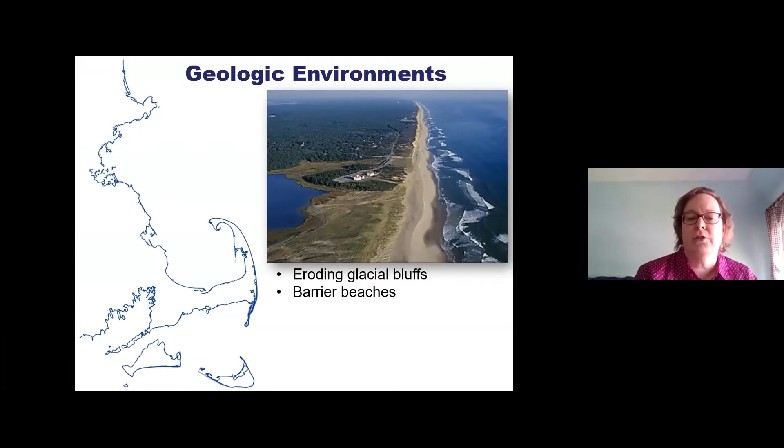We also have more cobble environments and even boulder dune situations that are natural systems. We need to keep in mind those grain size differences along the coast, as well as the ledge and bedrock outcrops we have.

Our tide ranges are anywhere from 1 foot to 11 feet, and the sediment types, as I mentioned, vary. The vegetation also covers quite a range of situations we're dealing with.

In the altered sites, it can be a little more challenging to pick out the resource areas, but they are still there. They still have some functions, and it's important to recognize how the system is functioning and how it can be improved.

As part of that, we also want to look at sensitive resource areas and make sure we're aware of any nearby submerged aquatic vegetation, rocky intertidal zones, shorebird nesting, shellfish, and salt marsh. These all play a role in the design, permitting, and implementation of projects, so they're very important to keep in mind.

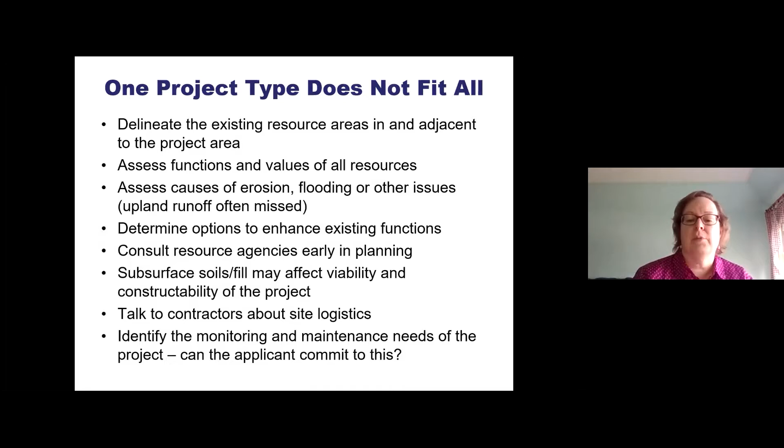You want to identify the monitoring and maintenance needs of the project, and can the applicant commit to this? In a lot of nature-based shore protection projects, it's very important to have some ongoing monitoring, maintenance, adaptive management program to make sure it's going to be successful and maintained in the long term. If you don't have a realistic plan for that, it can make the project challenging to implement, so thinking through that in advance is really important.

CZM has developed some Storm Smart Properties fact sheets on a variety of shore protection techniques. Certainly not all of them, but we're working on putting together some more of those.

The idea for these is particularly for property owners to help them make more informed decisions. This highlights what the shore protection technique is, where it's appropriate, where it might not be appropriate, how it functions to reduce storm damage, and what are some of the relative benefits, limitations, and ways to minimize impacts.

We highlight some of the design considerations to maximize effectiveness, and the permitting and professional services they really need to consider. Sometimes property owners think they can do some of these things on their own, and that isn't always successful for certain types of projects. We try to highlight the timeline, maintenance, and really point out some of those issues.

These are resources that a number of different audiences have found useful, and we'll be trying to develop more of those as we go forward.

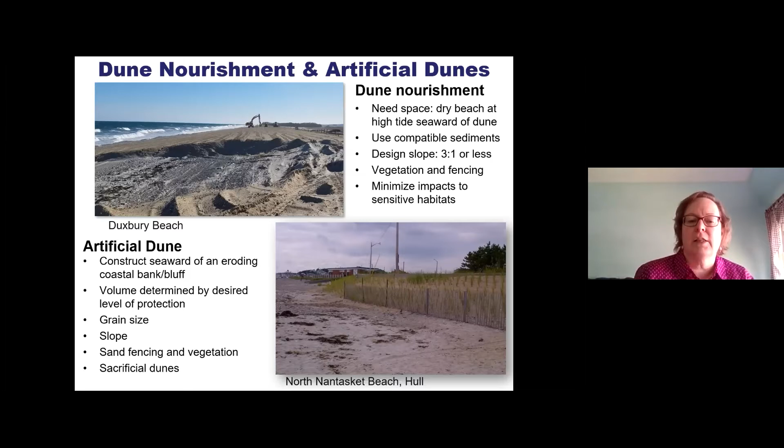We do try to highlight things like, for example, with Dune Nourishment, making sure you have enough dry beach width to have space for the dune. If you try to over-steepen the dune or put it too close to high tide, you can have a situation where it erodes much quicker. We try to highlight these things for different techniques that make a difference in the success of the project.

Vegetation is something that doesn't get enough credit for its benefits. We see a lot of places where there's just turf grass, and people wonder why they have a bit of an erosion problem. Turf grass doesn't have a whole lot of root system—it's less than an inch, very little roots, not a lot of holding power.

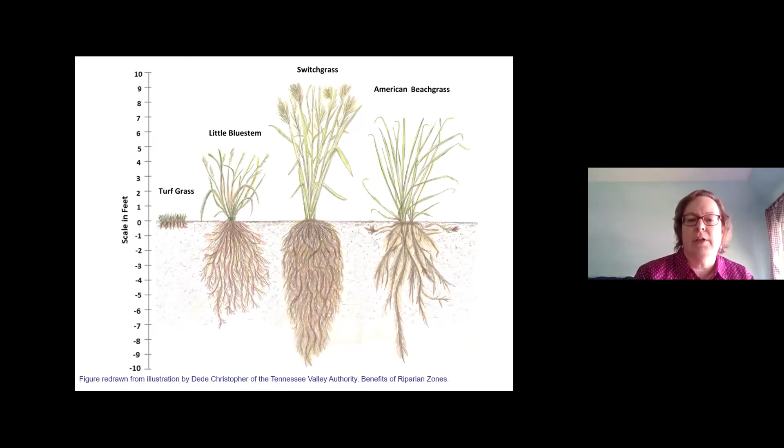Whereas if you use salt-tolerant native erosion control plants, those can have roots up to 10 feet and can be very helpful in holding the sediment, reducing wave splash, reducing some of the runoff, and slowing down the water. That vegetation can be a very important part of shore protection projects.

We looked at this as one of our coastal resiliency grant projects and worked with the town and their consultants to identify ways to enhance this site and reduce the erosion non-structurally.

In this case, they were able to look at creating a vegetative buffer with some native vegetation. They did create some access points through that to make sure people from the park going to the beach could still access it, of course.

We do have some tips for installing vegetation, specifically in one of the fact sheets—which vegetation to select for which sites, addressing invasive species. We have a lot of tips that are specific to the vegetation that you can take a look at in that fact sheet.

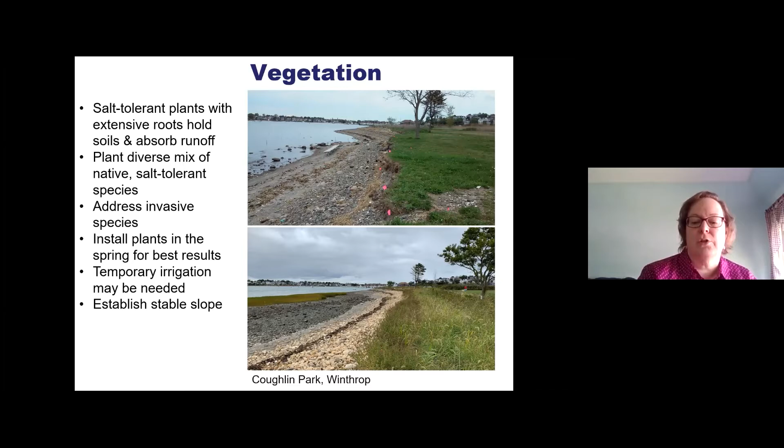You can also add bioengineering to vegetation to provide a little more toe protection at the toe of a bank. Fiber rolls can be very effective at giving you that toe protection so the vegetation can take hold. We strongly suggest avoiding Mirafi fabric or other filter fabric because that's just going to stop vegetation from penetrating into the soils and holding them in place. The key should be getting vegetation established, not so much anchoring rolls in place to provide the buffer. Those rolls are your temporary protection while you get the rest established.

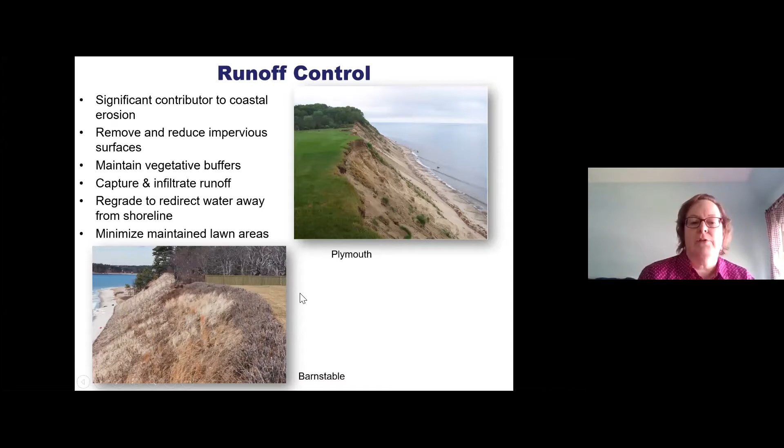Runoff is really important to consider. We've seen a number of sites where runoff is one of the key factors causing erosion. Irrigated lawns can be problematic in terms of increasing erosion, so maintaining some kind of vegetative buffer is really important. There's a big difference in how a site like this functions - they have a much higher erosion rate because of this irrigated lawn, whereas this site has sloped the lawn away from the top of the bank, created a nice vegetative buffer, and they were able to restabilize the bank with vegetation because of their efforts to address the erosion issues.

Fringe marsh enhancement projects are something we're seeing more of, and these are something you really need to carefully consider where you're putting them and whether they're appropriate for that site. You need to think about the potential erosion and flood control benefits to the site, and is that going to achieve what you're trying to do?

You want to be very realistic about the options for your site. You don't want to think that the marsh is going to stop 10 feet of surge. Think realistically about it - slowing down the water and stabilizing some of the sediments - and have a good idea of what you're trying to do with it.

The permitting pathway for marsh enhancement and restoration projects is typically easier if you have historic marsh that was there and you're just restoring it, or you're enhancing existing marsh. If you are trying to convert tidal flat to marsh, depending on the functions of that tidal flat, that may have more issues with the fisheries agencies in particular.

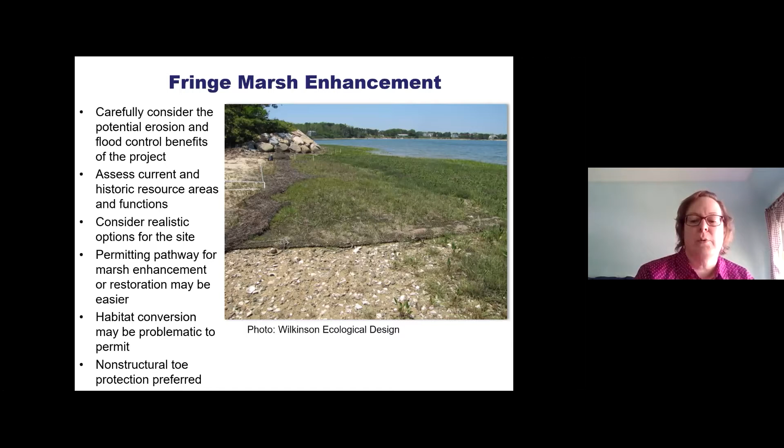So non-structural toes are also preferred for fringe marsh enhancement. That's something we suggest you consider as part of your planning process, and think about how you can design something that can be stabilized with a non-structural toe. If you're trying to build up a little bit of elevation, you need to think about how you're designing the plantings to stabilize it without long-term toe protection.

So if you are building up the elevation a little bit, make sure you're sloping it down and tapering it, and that the vegetation you're planting is going to be able to stabilize that when your temporary toe protection, such as your coir, breaks down.

So you want to think about a very detailed implementation, monitoring, and maintenance plan to get these projects installed. You can look at the adjacent areas and have a good idea what the plants are, but the actual implementation and what plants take where may be slightly different, and there may need to be some adaptive management - rethinking which plants you put where. What takes and what doesn't needs to dictate what you can replant and where.

That's really important - making sure the property owner or applicant knows that there's going to be some monitoring and maintenance while this gets established over a period of several years. It's sometimes necessary to do some temporary irrigation, particularly in the upper reaches of a marsh enhancement project, until you get that vegetation established. So keep that in mind as you're doing that.

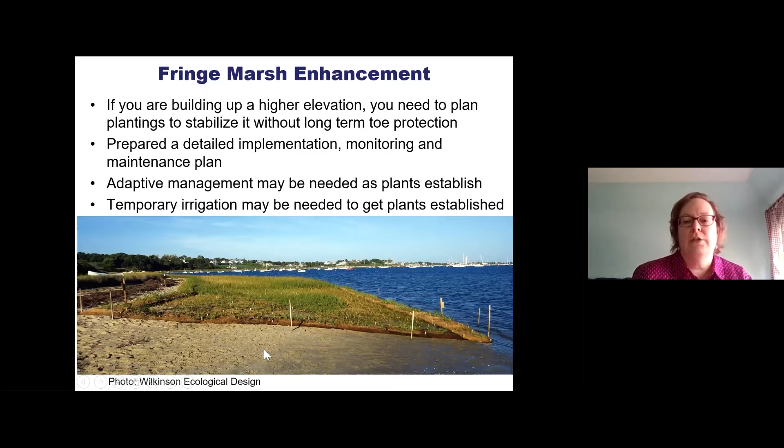So some resources for your projects. The Storm Smart Properties fact sheets are on our website. You can Google that and come up with those pretty quickly. The Beach Nourishment, Mass DEP's Guide to Best Management Practices for Projects in Massachusetts is available and has a lot of information for nourishment projects.

The most up-to-date shoreline change for the state is on our new coastal erosion viewer. That's not linked from our CZM website yet. We're working on that, but if you Google Massachusetts Coastal Erosion Viewer, it comes right up. It has the newest data for 2013 and 2014. And for any updated sea level rise projections, the best source is resilientmass.org.

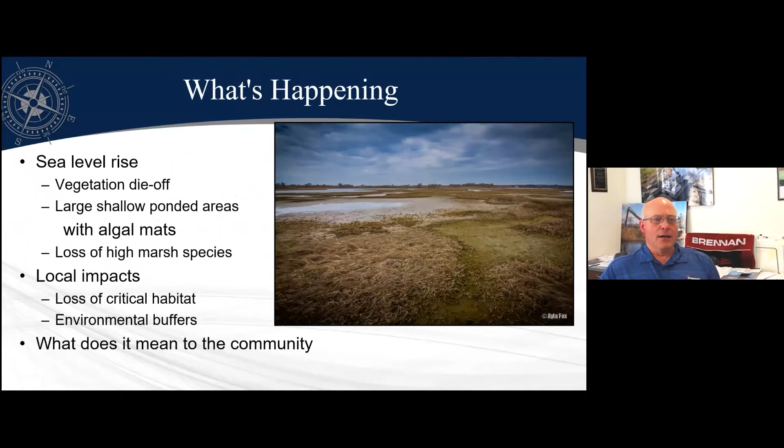So I'll go through some quick facts real quick. What's happening out there, where are we, how did it start, how was it done, and then more importantly, I'm going to focus more on the lessons learned. Obviously, we're out here because of sea level rise. They're seeing a lot of vegetation die off on these marshes, ponding, algae mats, loss of high marsh species, and a variety of different critical habitat.

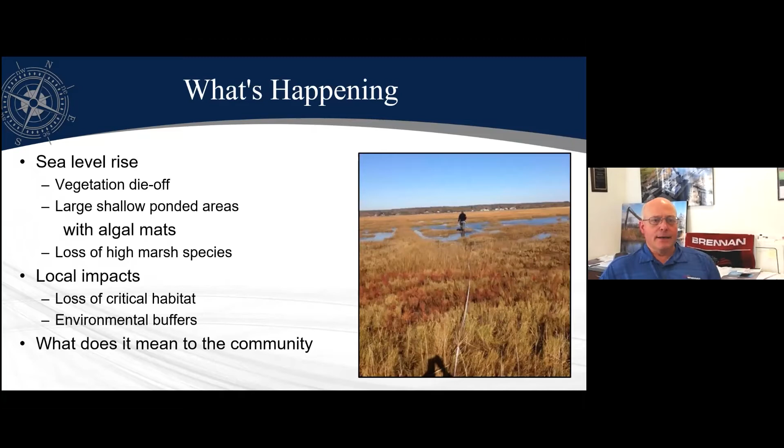The impacts are certainly great. They've seen these again and again. Some of these impacts include additional flooding on some of these marshes, but some of the impacts are on community fishing. I'm not going to go through the numbers, but the impacts have been shown and proven out there, the benefits as well as the losses. Tourism and trade, obviously for Rhode Island, and fishing are big. And then the environmental benefits — healthy marshes are nutrient filters, carbon absorption, a variety of other things. Getting back to the species of fish, additionally with aquaculture being a key issue on some of these salt marshes, as well as the ponds behind some of these salt marshes being critical.

And then loss of habitat for species and getting those back, and then even the stagnant pools dealing with mosquitoes and greenhead flies and things of that nature.

So where are we? We're in Rhode Island, looking at two different areas. The first one is, I'm always tough at pronouncing this one, Quonochontaug Pond. If someone wants to correct me, that's fine. I'm going to call it Quani from now on. They're located here. The area that we're going to be dredging is out in here, and there's the breachway access.

The other area is Ninigret Pond. Again, we've got a breachway access, which was part of the dredging application, and then used those materials for the construction.

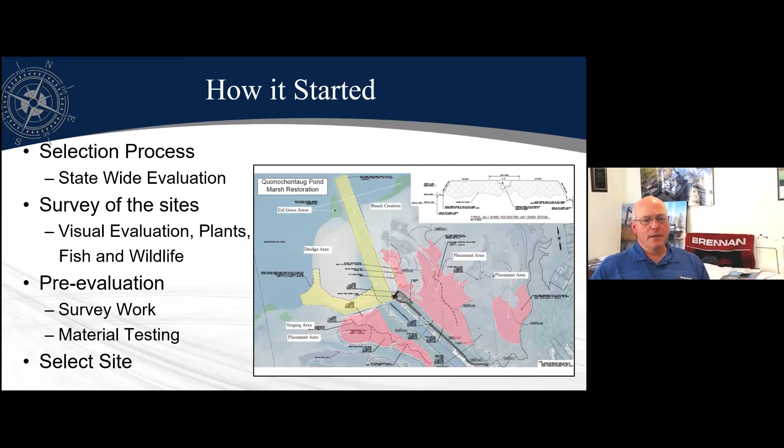As I mentioned before, aquaculture has become a big issue in those, and the oyster fishermen were really needing to see some additional water turnover.

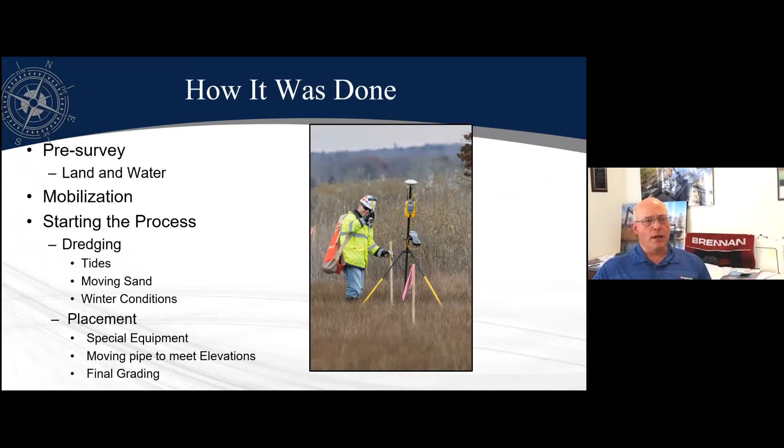So how it was done: we went out, we did our survey. We used different robotic stations as well as going out and doing hydrographic survey. We determined what the conditions were prior to placement as well as prior to dredging.

The areas were tough to work in. We had, for some reason, the two seasons, which were over a year apart, we picked the two coldest seasons ever. The project in Quani, the average temperature was 23 degrees during the entire dredging process, and we had days of wind chills of -40. And you can't stop. Even saltwater freezes at those temperatures, and you can't allow that to get into the dredge equipment and cause any kind of breaking of equipment or anything else. So we toughed it out and worked through these conditions.

Obviously, a number of safety concerns were involved. So we mobilized the site. We had to bring in a dredge, as well as some amphibious equipment and some barges to be able to move equipment around. One of the keys to any of these projects is to have a good access point to be able to swing in equipment. Sometimes people look at it and don't think about how it gets done. They just see what they want to get done. So access is a key factor, and understanding what tools the contractors are going to use to make it happen.

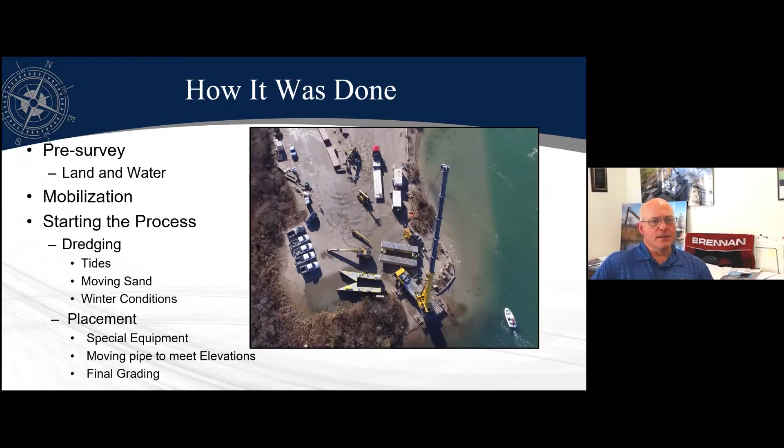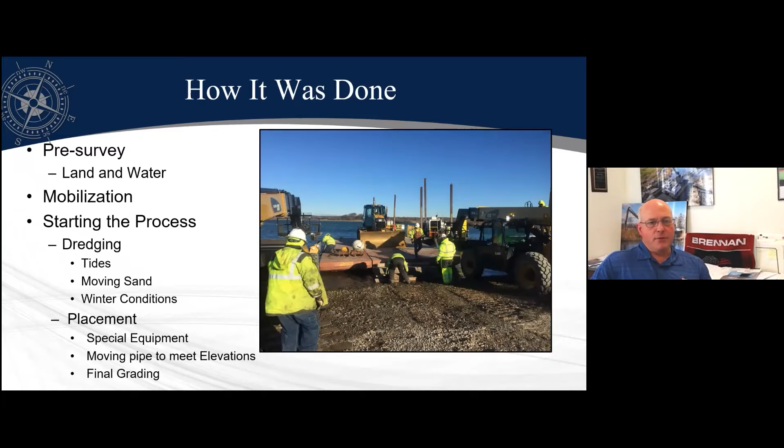This was a substantial amount of material to move, so we had to bring in some different equipment. We had to bring in some flexi floats, especially for both projects, because we had to move low ground pressure dozers across water to get to these different locations. So there was some logistical issues that had to be dealt with, along with some of the high flows in those breachways to be able to move that equipment.

Never fails, when you want to use a crane, it rains. But launching it again, a key component is to understand what you have available for this, because you can see this is a large crane. This is, I believe, a 200-ton overroad crane to be able to lift the dredge and put it into place. So those are considerations that really need to be looked at when you start evaluating some of these projects.

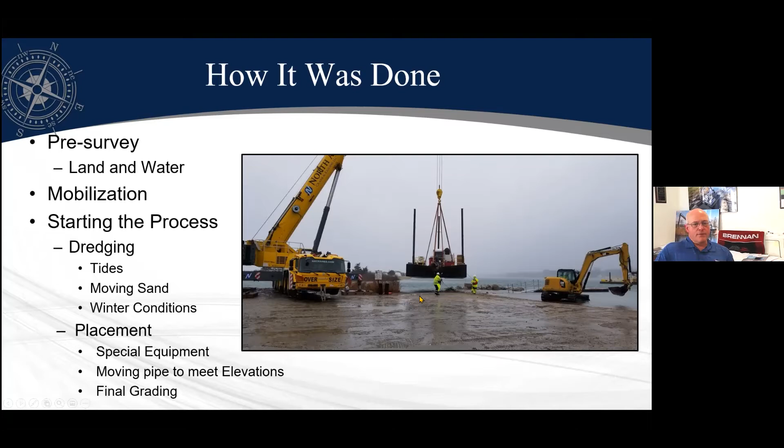We utilized two 8-inch dredges on both projects. They're swinging ladder dredges that we had manufactured to our specifications, a little wider and a little higher out of the water so we can get into very shallow draft areas. Very rarely do we actually get to see our dredge cutter heads work, but the water was so clear we were able to do that in this case. You can see how the sweeping action of the swinging ladder dredge pulls up the sand, and we can move it to different locations.

The other concern presented initially in our first project with CRMC was the equipment and its effects on the marshes. They were wondering how we're going to get the amphibious hoe over there, and literally when I was talking to Caitlin, she had her back to the water, and I said, 'That's how we're doing it.' She turned around and saw it basically treading its way across the water with a tether from a boat, because the tide was going out, and it would have floated out into the Atlantic if we didn't watch it. But it got over.

Then she was concerned about the grass, and these are extremely low ground pressure machines. This isn't just a low ground pressure machine, this is ultra low pressure—less than a pound per square inch—and you can see it tracked across there and didn't affect the grass. So again, some consideration and things to think about.

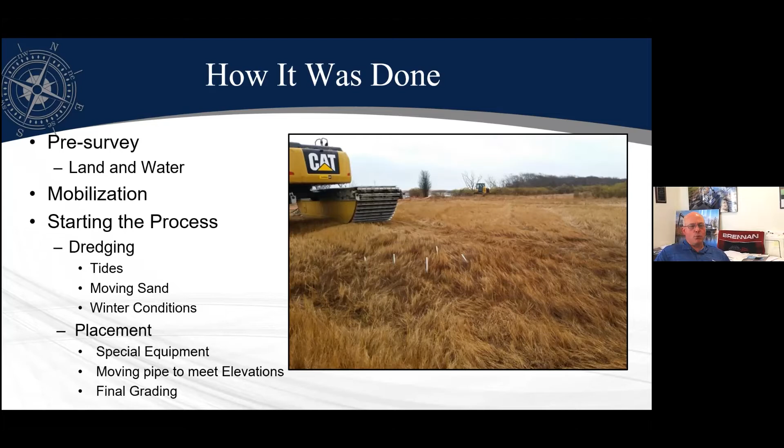It was determined early on by ourselves that we would bring the low ground pressure dozer over, but we wouldn't put it onto the marsh until we actually had a layer of sand that it could work on, to help offset some of the ground pressure.

So we had a lot of piping involved. They were filling in areas off to different sites so both dredges would be working into place, and once we got into those places, we were then placing the sand.

Again, the previous presentation discussed that every site is different, and this was certainly true for both of these sites. Ninigret had a very coarse sand. When it was placed, it dewatered very quickly and didn't flow. So we were continually moving the pipes to get the grades we needed in place. There was some flow, but not as much as the owner had expected, so we kept moving it to reach those elevations.

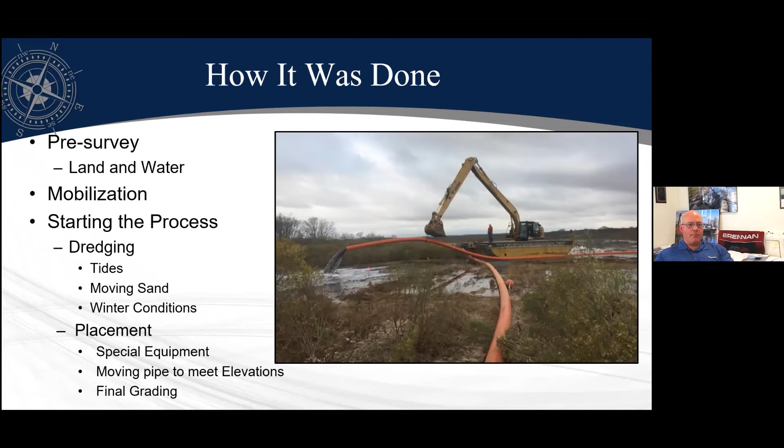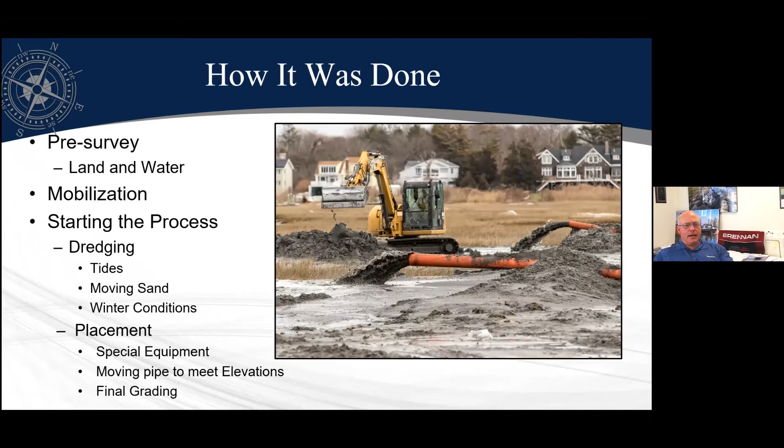Some of the thicknesses weren't technically thin layer placement, which is a big buzzword out there in a lot of marsh work, but not all of it. There were some areas with severe erosion and significant loss, where we had to bring in material, in some cases replacing as much as 10 to 12 inches of sand to get the grades correct. This other material flowed a lot more—it had organic material in it, very fine sand—and we were able to move the material quite easily to get it in place.

Once we got it in place, as I said, we had low ground pressure dozers, which is suitable—not the ultra low, but good enough once you've got that layer on top—to be able to get the grade. The key was being able to utilize ground, basically grade control.

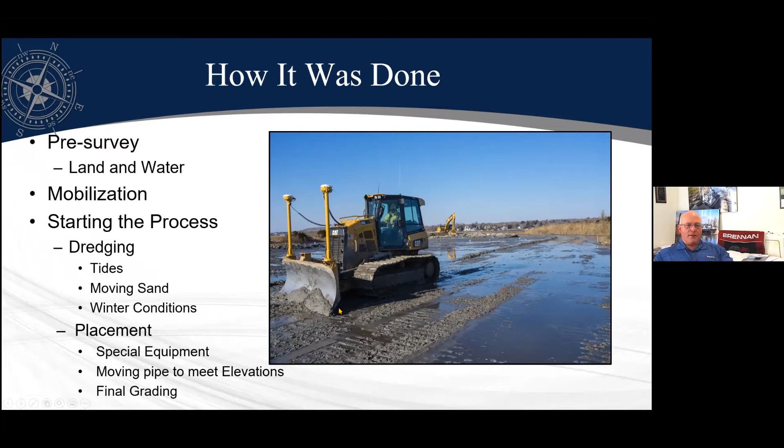Grade control was critical on any of these, because these sites needed to be graded in a specific way, to flow evenly across the sites up and down through tidal changes, and not create their own erosional effect and channeling. We'll talk a little more about that in a second, but it was very critical in getting the equipment put into place.

I'm going to show you a real quick video, only because it shows some of the activity going on.

As you'll see, the project is right on the ocean here. We're coming through the breachway. That's in some cases ice, since it's see-through.

This is one of the larger sites, actually the second largest site at the Quonnie site. You can see after it's been placed, it's very flat, with a lot of exposed sand, which we'll talk about again. The dredges are dredging in the channel and bringing that material over to those different areas.

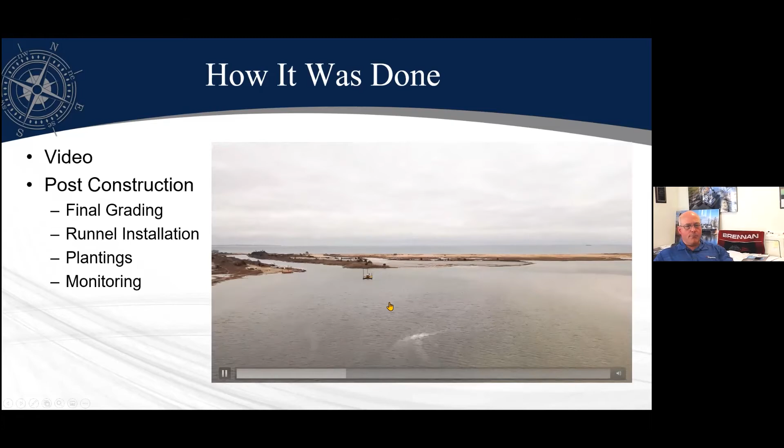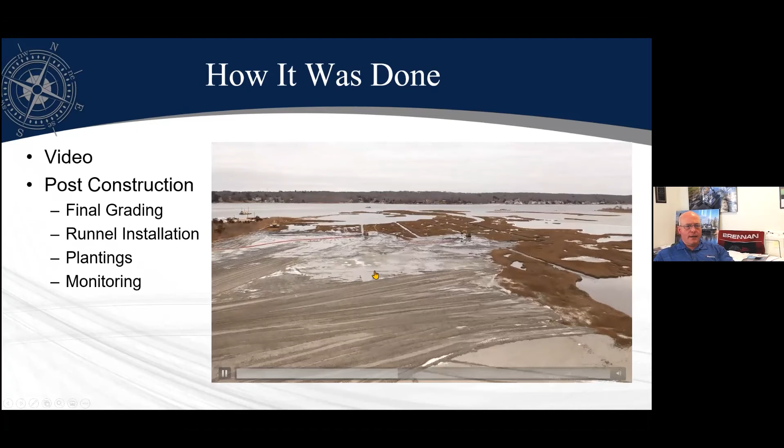Getting access and dealing with the tides is one of the critical things, understanding what those depths are. This is the original first start of the placement on Quonnie, covering this large area and filling in some of these mosquito ditches, moving the material.

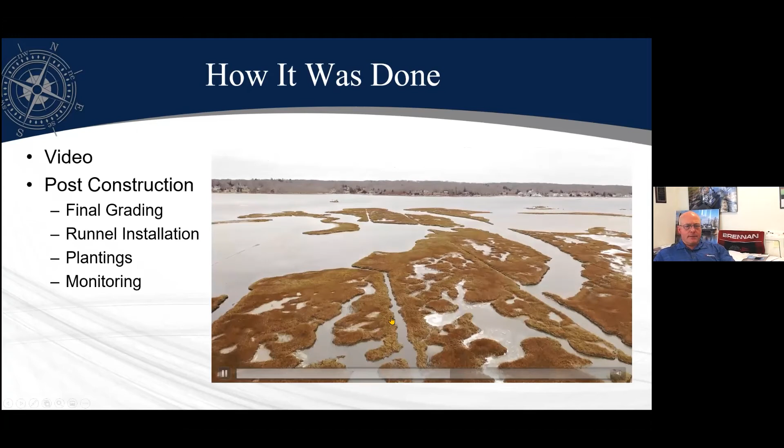You can see by the flow, Quonnie moved a lot faster than the other. Ninigret was a little different - the material was coarser, so it piled up quickly and we had to move it and spread it. In both areas, the water was able to flow off quickly to the side.

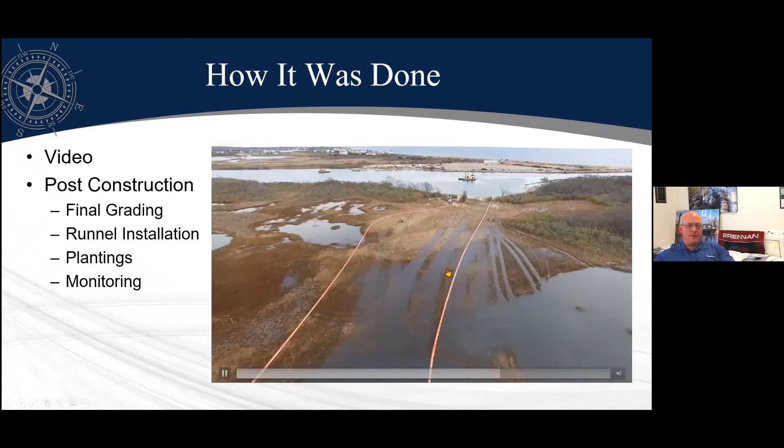Very little turbidity, though a bit more on Quonnie than the other. And you can see this is the area we're pulling the sand out - it was basically filling in almost as fast as we were taking it out.

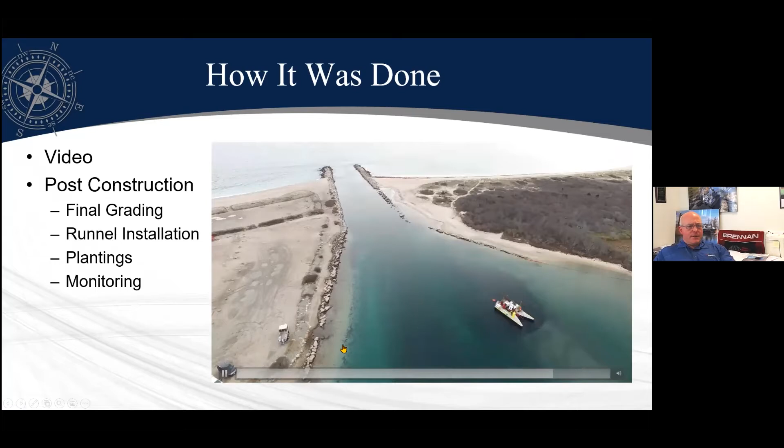Once the material was placed, you can see this is one of the large areas. It looks like a barren desert, which for the most part it is, once you put that material down.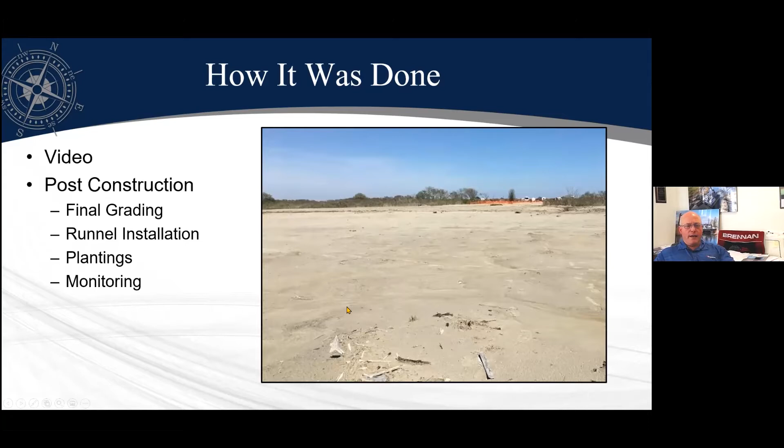You can see in this case there was some water flowing over the top, and some of the debris line shows as far as the tides came up. So we had some pretty good grading going through here. Again, it was critical to have that equipment up there to get those grades.

You can't just sit there and put it out and leave it in place - it's going to be mounded. You need to get that critical grade across the site.

One of the issues we kept running into with the grading was understanding the settlement rates of these marshes, which sit on top of large peat deposits. So the material needed to be placed and set for a little while before we could do a final grade.

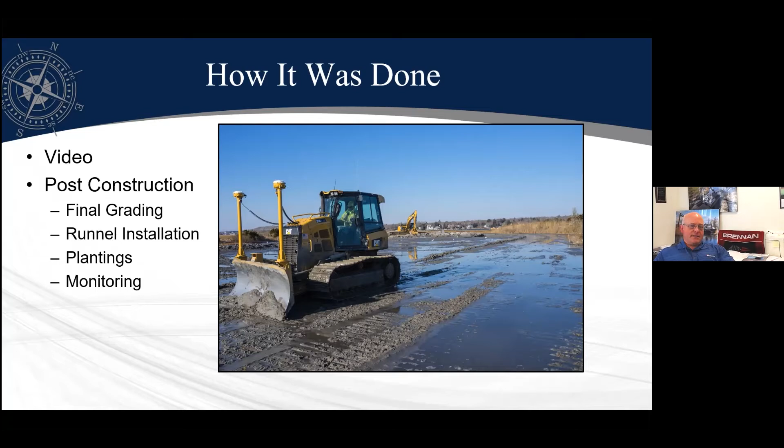We would place it, get a rough estimate of what the grade was going to be and where we had to take it, then do a first pass, let it set for half a day or a day, and then come back and do a final grade.

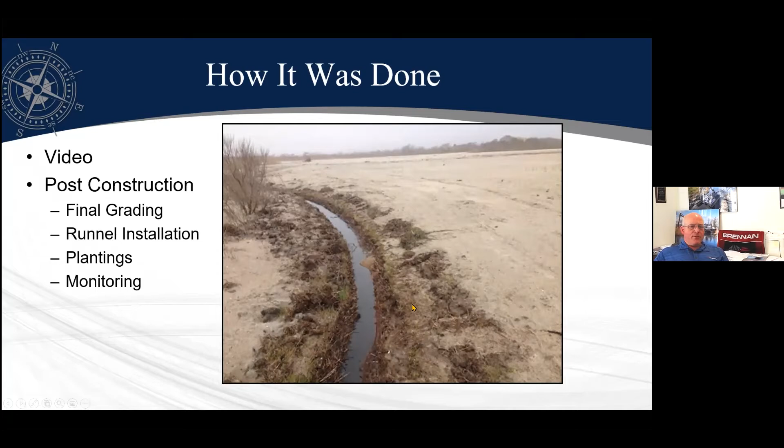Some of the runnel work installed afterwards, we did not do - this was actually done by Save the Bay and Wenley's group. They went in after we were done, with some predetermined locations, wanting these runnels in place to allow movement of material up and down the marshes.

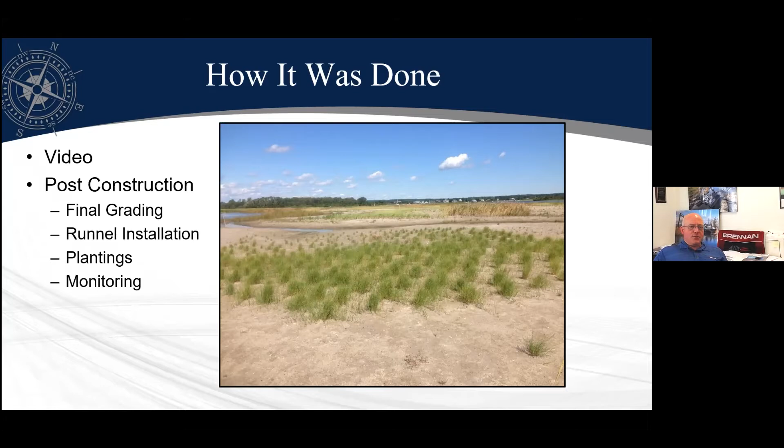They also incorporated some plantings, mainly for a couple of reasons - one to start regenerating plant growth, but also for wind control. It wasn't as big an issue on Ninigret, but Quonnie was a big issue because of the fine sand.

Then we went back and did some final survey once it was placed, understanding some of the elevations, doing some plant surveys and monitoring.

This was pre-dredging, post-dredging - this is Ninigret post dredging - and then the final was one season later, so really two seasons in a sense. Later, we had some great growth coming in.

This is again that site, just taken this past Tuesday. Dan Goulet got his drone out and took a nice shot of this - as you can see, it came back very well.

The runnels are working, the flow is coming across the marsh great, and from what I was told all the species they wanted are coming back. There isn't any invasive coming in, so very successful.

Quonnie, this was that large area - you can see some of the runnels they had installed going through. We removed all of the mosquito areas or ditches. But what they found here, which was brought up before - I'll get to that in a second.

Again, this is some of the runnel work that was done, some of the growth after one season. And another shot - you can see the growth coming in and the thin layer placement starting to fill in.

The goal here was not to really go back and plant everything needed, but more to use what was available and then plant where needed. This was all natural coming back in - they didn't have to plant this.

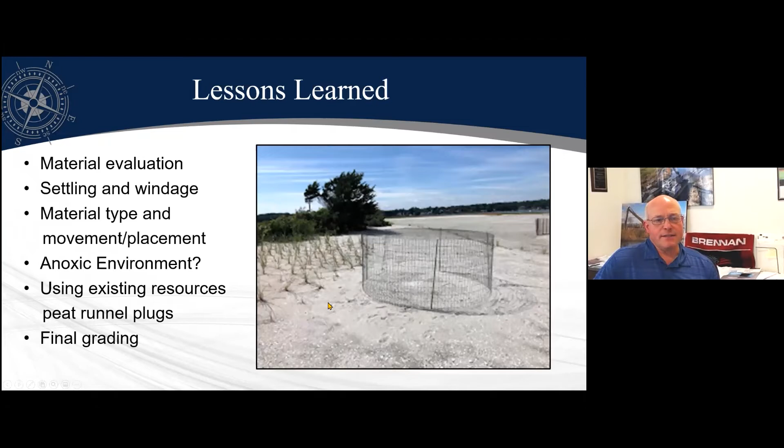This was a very cold day. We had a variety of people in there, the Army Corps, as well as the owner and Save the Bay. Very good discussion, impromptu - there were 14 people. This was pre-COVID, obviously, a bunch of people in a small trailer, having coffee and donuts and just impromptu conversation about how Army Corps is looking at some of these projects. They were very impressed with how the state was doing it and looking at doing some of this themselves.

It was a very good interaction between the groups. Hey Andy, the other thing is keep the oystermen happy, get water into their bays, and they will reward you. The boys from Wisconsin that came out, most of them never even saw an oyster, let alone ate one - now they all are professional oyster shuckers. They have their own knives, and we're enjoying the fruits of their labor with the local oystermen in the area.

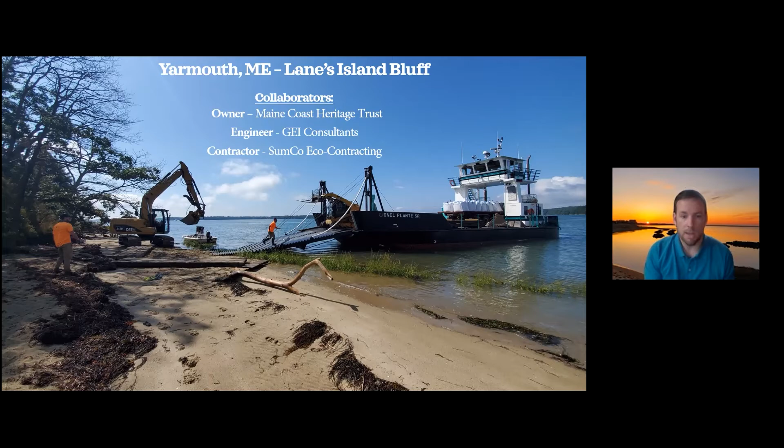The first project I wanted to talk about was the Lanes Island Bluff Restoration, which was up in Maine. The owners were the Maine Coast Heritage Trust, GEI Consultants was the engineer, and yours truly, SumCo, was the contractor. This was a good example of early collaboration that went really well.

Great title picture here, and a couple project pictures on the right that'll explain. The teaming up part of this project's design intent was to use natural materials. As much as possible, this project was part of a grant that really stressed using on-site and/or natural materials — designing with nature, apparently.

The main point of this project was to stabilize an eroded coastal bank on an island in Casco Bay, Maine — a great place to work. If you haven't been up in that area doing any work, I highly recommend it. This project was only accessible by boat and by barge, which only made the project more fun, in my opinion.

To my first point about using existing and/or natural materials, the only imported material we used for this project was topsoil and some assorted small hardware to lash things together. Existing fallen trees were cut to design lengths, as you can see in the lower picture, and fastened together to form a cribbing structure to stabilize the eroding bluff. That structure was then backfilled with on-site sand, capped with topsoil we brought on site, seeded, planted with native species, covered with erosion control blanket, and buttoned everything up.

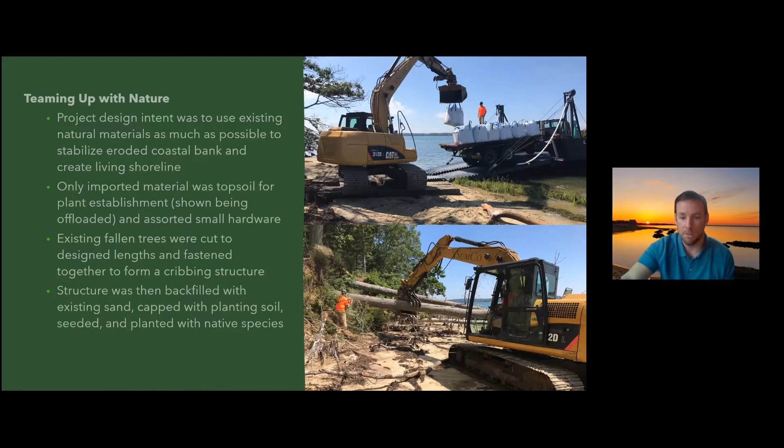On the collaboration end of things, GEI Consultants, their main office in Portland, entered into agreement with us to provide assistance designing and implementing 3 different pilot projects in the Casco Bay, Maine area, using nature-based stabilization techniques. This was one of them. There were 3 different projects. Two of them were right along the coast that we could accomplish using volunteer labor, minimal equipment, and donated materials, so those were pretty easy. This particular project, Lanes Island, was its own animal. We needed to barge materials and equipment to the site and use construction expertise to accomplish what we needed to do here.

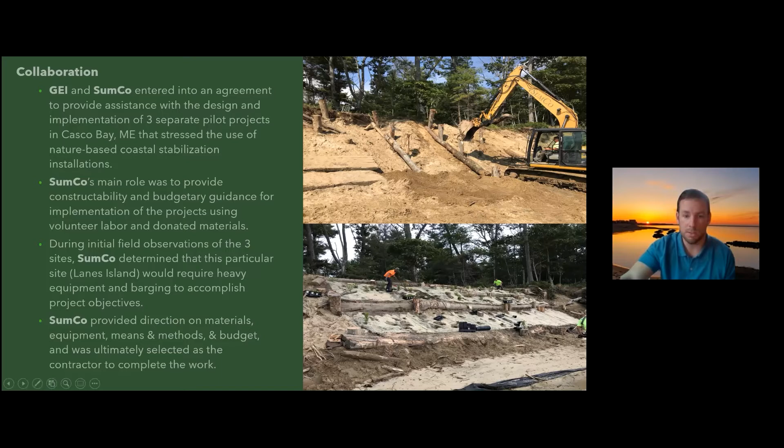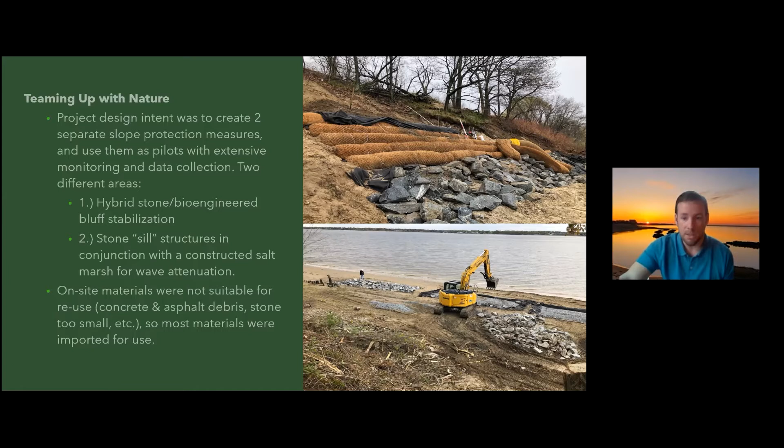But results were pretty good. Here you can see more of the post-construction photos. Top photos show that bluff restoration, the hybrid stone toe and coir log, and down below is the stone sill structure, which you can see off to the left, and the finishing touches on the surface of the marsh there.

Collaboration between GZA and Sumco - we were able to team together early on in this project for Nature Conservancy Rhode Island. I think the project went really well. There's ongoing maintenance and monitoring involved, and early indications are that things are establishing - both of these project types are working out really well.

The third and final project example is one we're actually currently wrapping up in the next couple of weeks, but I was able to get a couple good pictures. This is at the Katharine Hepburn Estate down in Old Saybrook, Connecticut, where the land is owned by the Lynde Point Land Trust. The project was administered by the Connecticut River Conservancy, with GZA GeoEnvironmental as lead designer and Sumco on the contracting end.

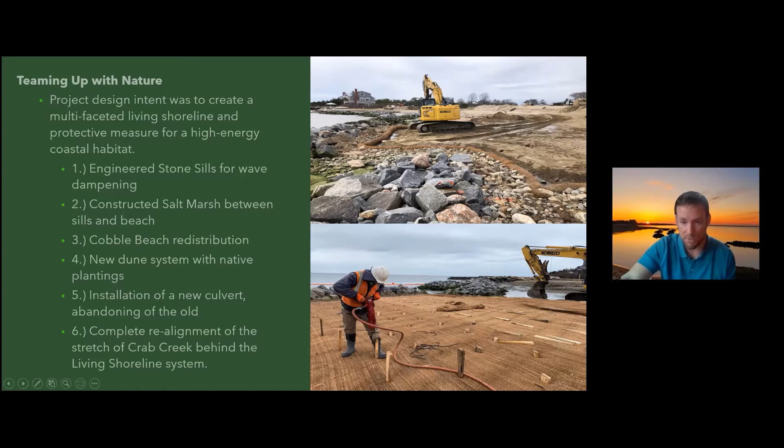We were able to team up and come up with a pretty good design here without taking up too much time. The top and bottom pictures are during-construction photos - to the left you can see the stone sills, the beginning of marsh construction, and in the bottom picture the finishing touches on the marsh surface again. This was another example of good early collaboration. It started off as a real design-build type project - the owners eventually went out and received some extra bids for it, but ultimately it turned into a pretty good team between GZA and us. You can see the results here on the right.

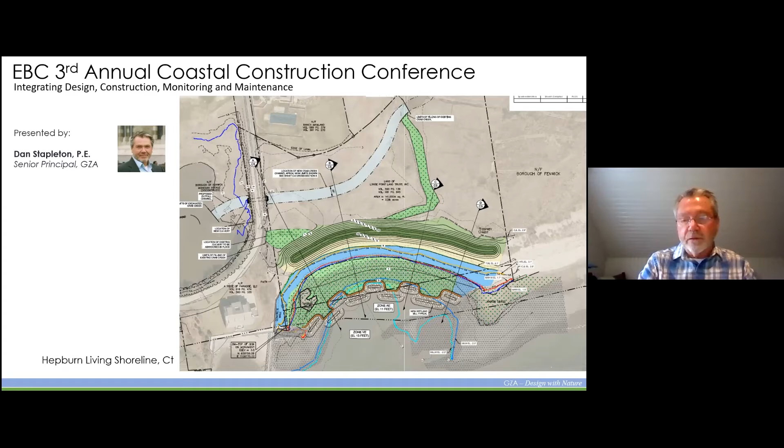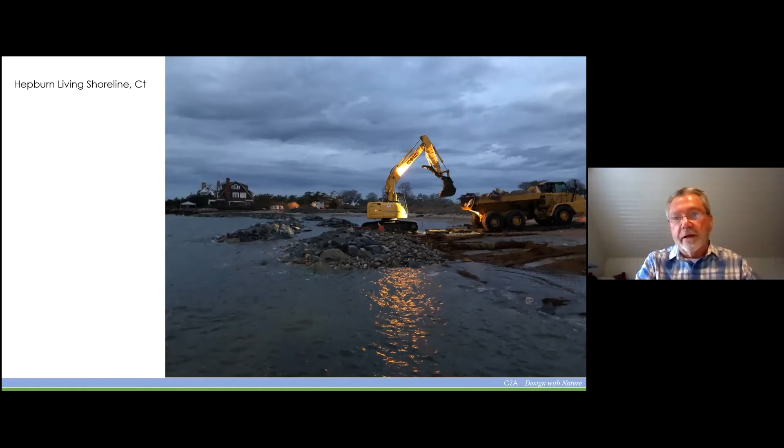So just some quick photos - that's during construction. You can see we oriented the sill so pretty much all the work could be done at low tide conditions. So they're working in the water, but for the most part it was a pretty dry job.

So the job has been substantially complete. There's more dune work, there's some more reconstruction of the cobble beach, and obviously you don't see the marsh vegetation yet. So that's coming up in a few weeks.

So really what I wanted to spend most of my remaining time on is some of these talking points. And these are kind of my lessons learned, or I wouldn't say lessons learned as much as just points that I wanted to introduce for discussion within the industry going forward.

But the first is that the dynamic nature of these projects really categorically separates them from traditional design and construction. And I start with that point because that sets the paradigm for the entire project. And as these become more common, we have more and more engineers and builders trying to get into this market.

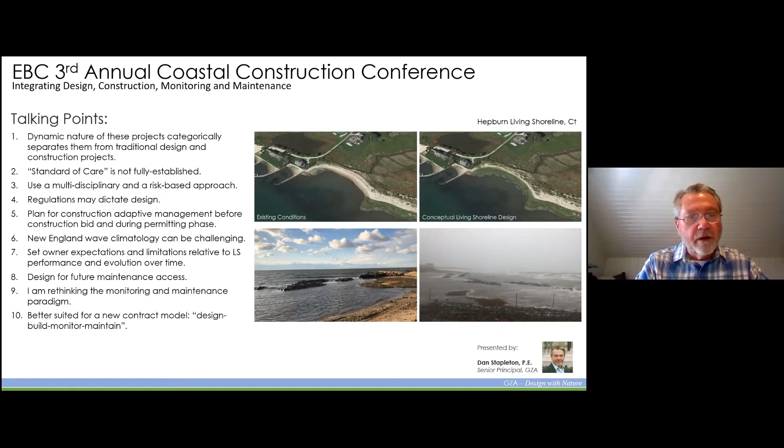So given all those other talking points 1 through 9, I really feel pretty strongly that we want to rethink the whole contract approach to these. I'm leaning more and more toward this idea of having a design, build, monitor, and maintain contract. Certainly the design-build part and its merits are pretty obvious, but this idea of extending these contracts through maintenance, maybe 5-year contracts, maybe even 10-year contracts, I think is a really interesting concept, and I think it's also going to produce better projects.

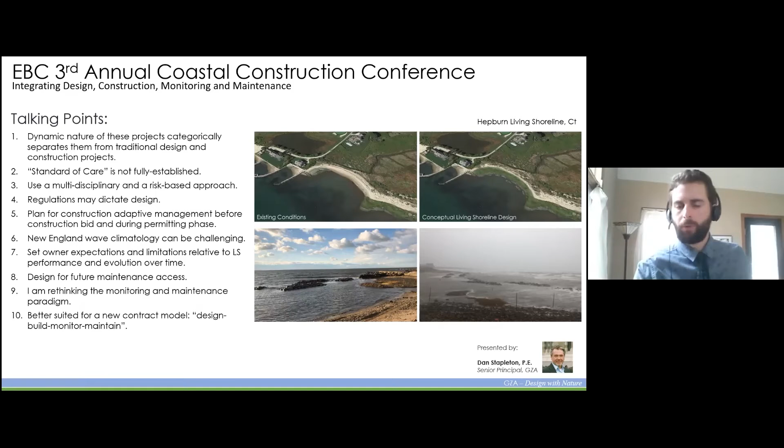So our next speaker is Ken Cirillo. Ken is the director of the Barnstable County Dredge Department, where he oversees the department's two hydraulic dredges and their crews. The county dredge program provides dredging services for the towns on Cape Cod, and it's moving into its 25th year. For those unfamiliar with the Barnstable County Dredge program, it's a huge asset to Barnstable County and the local municipalities, giving them the opportunity to leverage the shared asset, and depending on the nature of the project, complete projects well below market rate.

In his previous career, Ken had worked for Garmin, so I'll probably have to reach out to him after this and see if he has any connections so I can update to the G3 charts. So plenty, we'll turn it over to Ken. Plenty of connections. Thank you all very much.

I think one thing I'd like to go through here is a bunch of slides just to give everybody an overview of the program before we go into some of the projects. I'm new to the program, I started just in August. I'm not new to the industry, to the maritime world, but I'm new to the dredging industry, and I get this great job of being the big cheerleader for our group of guys, and it's a very small group, as you see. So I just want to go through who we are, what we do, our customers, our stakeholders, and then the overviews of the projects.

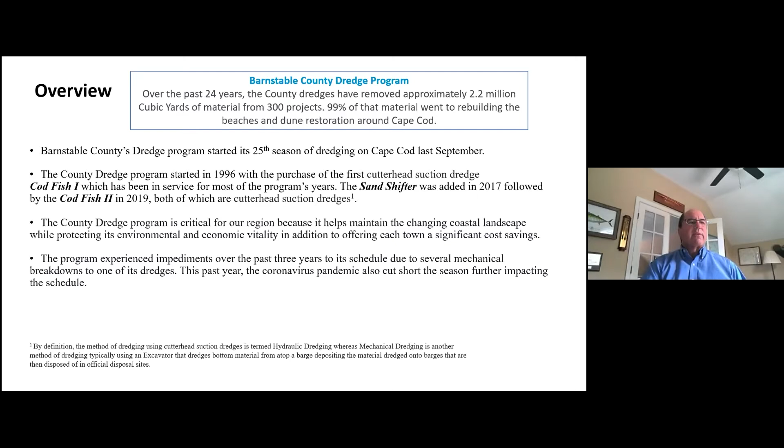The program is very, very unique, it's a county program, and it's set up as an enterprise fund. So we actually have a P&L. We don't take any funds from the county. We are supposed to be self-supporting and able to have funding to grow the program as necessary. Yet another challenge for us because our rates haven't risen since around 2003 to 2005. A whole lot of things have gone up since then. So we are now working on trying to begin the process of getting some better rates in place.

The season is quite unique for us in that it starts in the off season on the Cape. That means October to mid-June. We run into all the time of year restrictions, of course. We certainly wish we were operating in other times of the year, but there are many challenges, not the least being that you don't want to see dredge material coming out when everyone's sunbathing on the beaches down here.

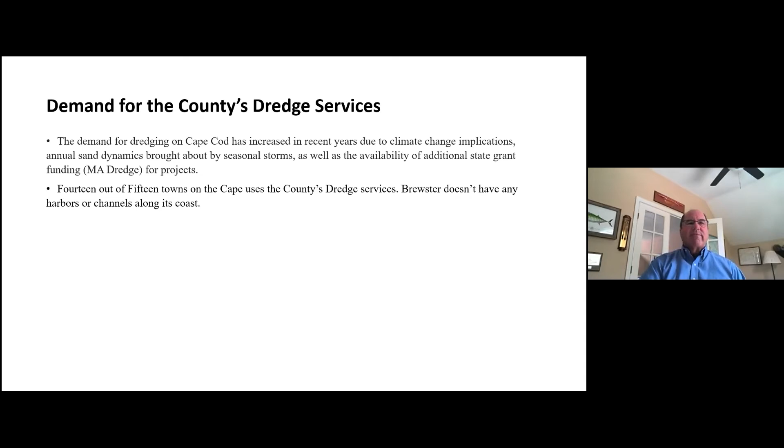The demand is pretty significant. We do projects for 14 out of the 15 towns on the Cape. The only one we don't do it for is Brewster. Brewster really doesn't have any harbors or channels along the coast, that's the reason why. Most of the programs have funding from the towns, and most of them have 50% or so from Mass Dredge for the projects.

The capabilities have been a big challenge for us because, as I've seen in a short period of time, there are a lot of the good old stories of what we used to be able to do, and why can't you do it now? A big part of the challenge going forward has been to right-size the program in terms of what we can do and what we can't do. I won't go into all these things here, but it's important because, as with any contractor, and we really are a contractor if you will, you need to understand what we can do and what we can't do. Previously, some of the problems have come in where the expectations were unrealistic with what we could do.

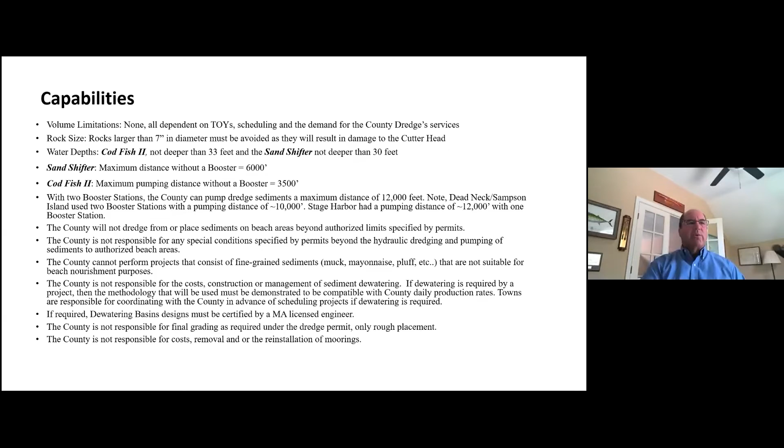Some statistics, which I think are great for us. As I mentioned, we're probably about 3/4 of the way through the season. We're coming up at about 102,000 plus cubic yards. We've done projects for 9 towns. Our smallest project was a very small one, but a significant one, 203 cubic yards. We'll go into that one in a bit.

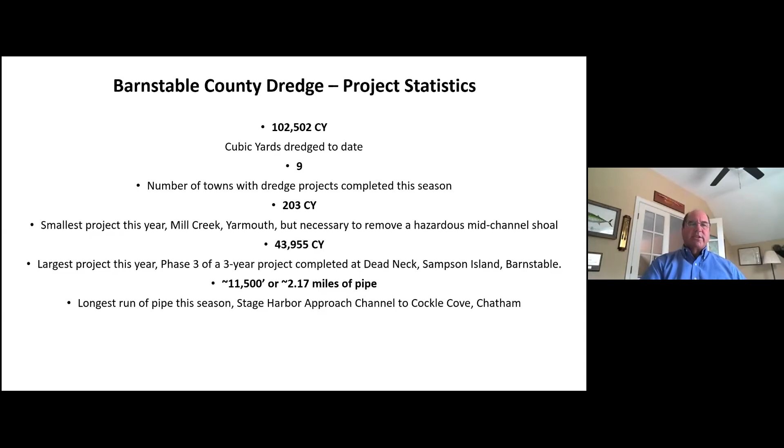The largest one was for Dead Neck Sampson Island, phase 3 of a 3-year project, about 44,000 cubic yards. And we just completed a very large project at Stage Harbor, the approach channel. We had up to a little over 2 miles of pipe running from the channel all the way down to a booster station, one booster station, with discharge further down to the west, Cockle Cove.

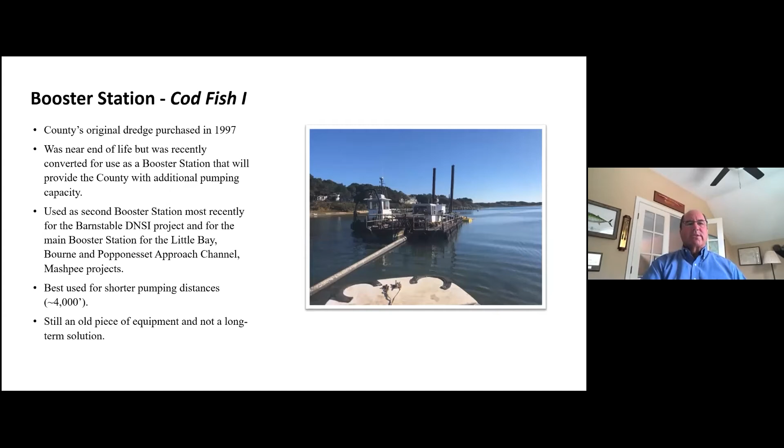And this is kind of a neat story, this is the Codfish 1, the original one. We were sort of ready to put it out to pasture this past season, but then we decided the hull's in pretty decent shape and the booster pump on board is in pretty decent shape, so let's turn it into a booster station. We removed the ladder, we took out all the hydraulics. We've used it on a handful of projects, and it's really helped us out because we've had it in line with 2 booster stations for the Dead Neck project, and it's done a handful of other projects on its own. A very large booster pump, this is bought in 2003, rebuilt this past year, great capacity, and again needed on these large haul projects.

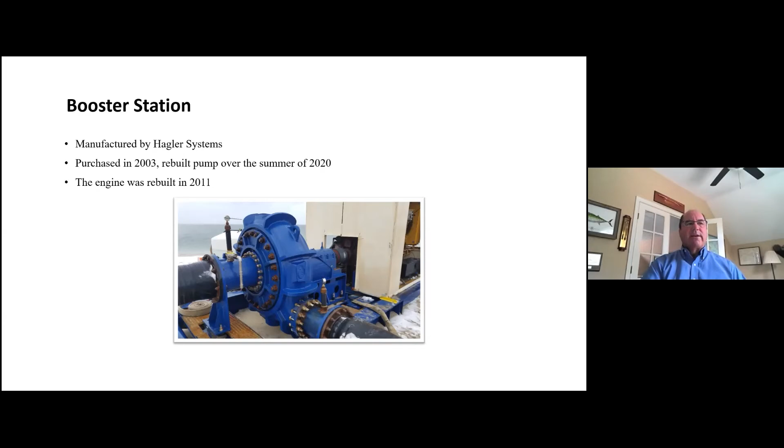One thing that we do, which is kind of interesting, is that we do have our own dredge advisory subcommittee. It's made up of all of our stakeholders from each town. These are pretty much the folks that we deal with on a town by town basis. Very helpful right now in terms of trying to get this rate changes going through.

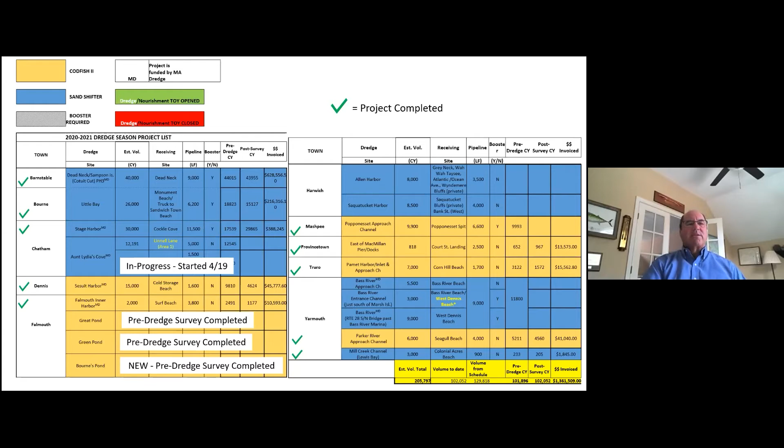The schedule, as I mentioned earlier, it's a big schedule. It's a very, very, very tight schedule with zero room for problems, which of course are always around us in terms of both the weather and mechanical challenges. We have had one project that we have not been able to complete, the Bass River project, which unfortunately ran into a TOY restriction. A very, very small group doing a lot of work.

The schedule, as I mentioned, is just too tight. No allowance for weather, no allowance for breakdown, no allowance for mobilizing. It is something that we have to deal with, trying to figure out some ways of improving on the efficiencies of the mobilizing and demobilizing, having the towns be part of our solutions, storing pipe. We have to haul pipe from way up in Buzzards Bay all the way down to Chatham. We ended up going to the private side on a tugboat, which was absolutely fabulous for us.

The TOY restrictions are absolutely restrictive for us, especially in cases of winter flounders where we haven't seen and haven't had reports for 20 plus years. We'll talk about the eDNA project in a second.

A big problem we have on the P&L side is in some cases we have not been able to get out and get the post-dredge done in time, and there's significant backfilling, and we're reducing and losing our billable volumes. Probably the biggest scheduling problem is that on almost maybe 70% of our dredge programs this year, we're seeing what was supposed to be the volumes coming from the town, coming from the consulting firm that's working with the town, are way off compared to reality. A lot of this has to do with the fact that until these project sites are resurveyed with more up-to-date technology, we're not going to have better efficiencies on the planning side. That'll take a while.

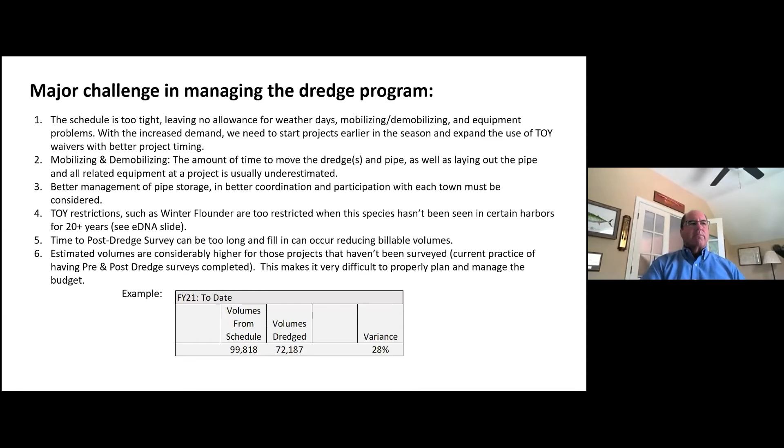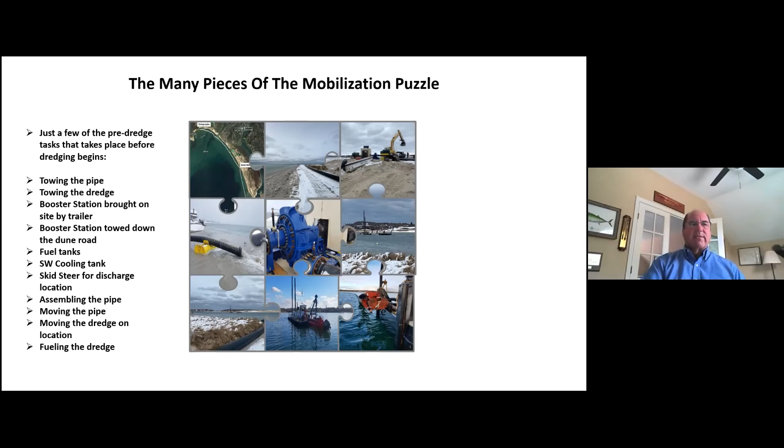Mobilization is a big, big challenge, grossly underestimated. You have to bring 2 miles of pipe onto a site with a booster station, fuel tanks, coolant, pumps, and on and on. It's not a couple of days, it's a week, it's 10 days, and it's a lot of time. But there's a lot that has to go on, and this is another one of those challenges in terms of showing our stakeholders and everyone else the reality. This is not theoretical, this is what happens on the ground, and it takes a lot of time.

An eDNA project that is new to Massachusetts, and we are one of the stakeholders and partners on this program. We're looking for various funding sources right now. Basically it's being used in a handful of other states, doing water sampling on a routine basis, then sending it to a test lab up in Gloucester, looking for DNA of the winter flounder specifically. The hope is this will give us some relief on a handful of projects, certainly on the south side of the Cape, where we have restrictions blocking us from dredging because of the winter flounder. For the most part, this is a scientific method to see if it will give us relief. It's unclear yet, but the state, our Massachusetts DMF, is one of the sponsors as well. So it's good to see a progressive approach to this.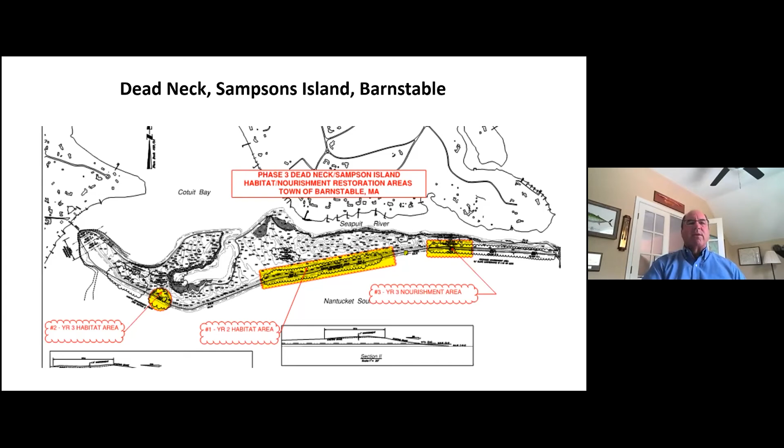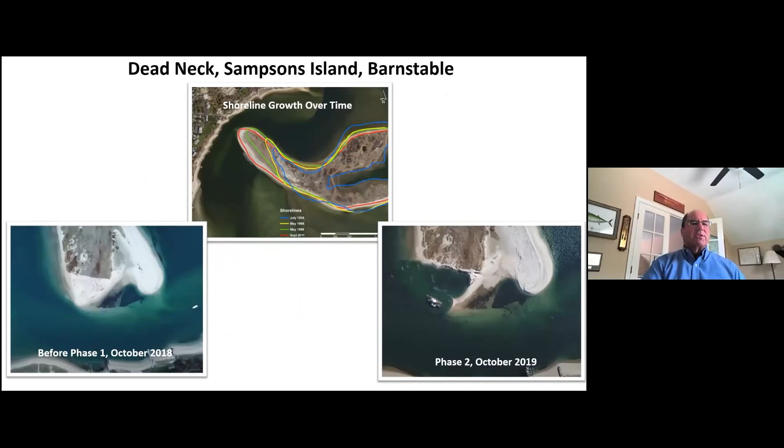44,000 cubic yards, about 110, lopped off a big chunk of the island, as you can see here. Over 3 years, we put different nourishment areas and habitat areas in 3 different places of the island. On the left side is where the island was encroaching on the mainland side, and in 3 years the county dredge took pretty significant pieces of that real estate away. Flushing was increased, which was one of the major benefits, along with the nourishment and habitat generation there. Very successful project, though it'll have to be done again in a few more years with much smaller volumes. We've got a lot of work ahead with the town on the west side as well, so it's a very dynamic spot. The center screen shows the growth of the island over time, and the bottom left shows phase 1 before it started going through phase 2, and so on.

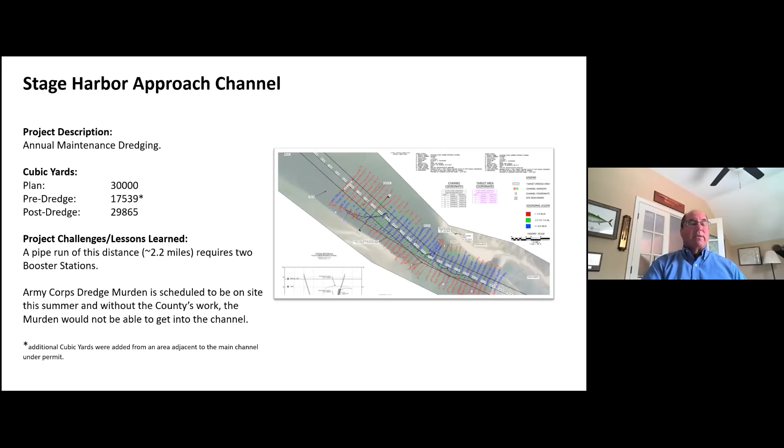Stage Harbor, this is the project we just completed. Major problem down here - we could have dredged, we could still be dredging, we could probably dredge for another 3 months or more. There's so much movement coming off from the east, from Morris Flats into the channel. If it doesn't get dredged, the channel will be shut down. We had to widen and open up an area. They're planning to have the Corps come in with a Murden sometime in May or next month. If we hadn't done the work, the Murden wouldn't have been able to operate because it's so shallow.

We actually did a small job where we filled some habitat for plovers down towards the eastern end, and then the middle section. Little Bay Bourne up in Buzzards Bay, a very interesting project again, improvement, maintenance, dredging, 2 areas.

The improvement spot was really a challenge for us. The surveys that were done don't do the type testing of the bottom, and it was very rocky. Major problem, obviously, for a hydraulic dredge where you're supposed to be dredging sand and water, not rocks. A lot of damage could occur. Fortunately, we did not have any, but we did have a lot of times to stop the project.

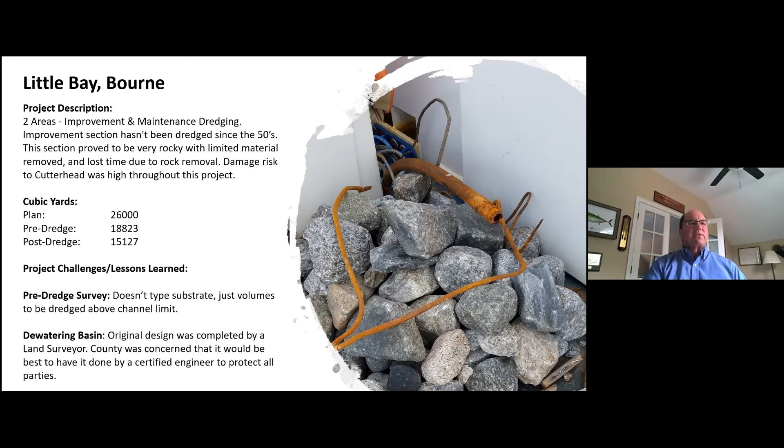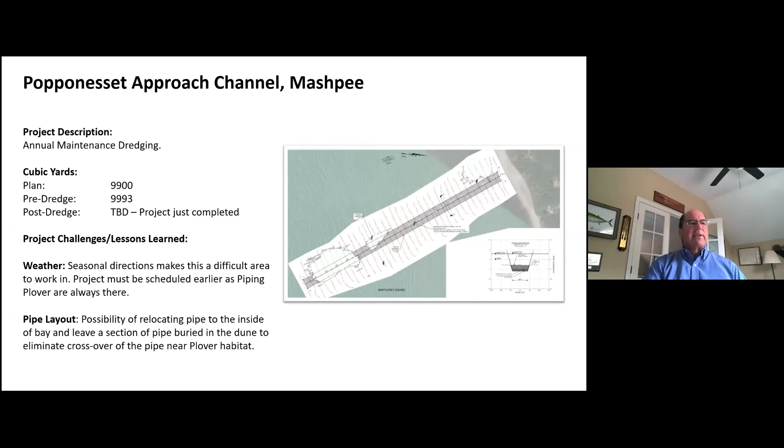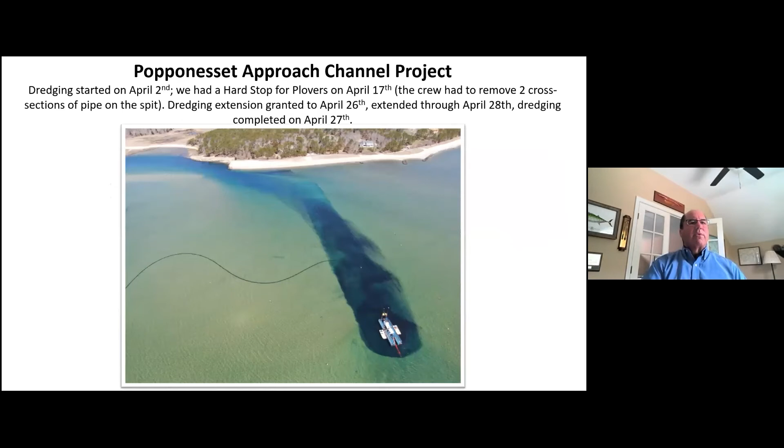Interruptions from the plovers. We're past the April 17 deadline, so we had to get an extension, and we had to get a separate extension. Yesterday we had a hard stop to get all the pipe off the beach for the plovers. So another time that we're behind and we're always rushing.

On the north side of the Cape, Sesuit Harbor, an interesting one because annual dredging has to be done here. Each of these, I'm trying to show, the plan was originally 15,000 cubic yards. Pre-dredge came back at 9,800. We know we dredged 10,000 easy. The post-dredge came back at just 4,600.

This, on the port side and the left side of the channel as you're heading out, there's about a 10-foot high bank of sand that is just sitting there waiting to drop in and fill the channel in, which happened when we had a 3-day nor'easter after we finished dredging. So we know we lost a lot of volume, and we know that it moved right back in and filled part of the channel.

Just different shots - what's the cost of a hazard here? I think this one kind of just boils it down, as a contractor. We have jobs because we are in this sort of odd position of being a municipality doing work for the towns. We win some and we lose some, and this one we lost.

It was a very, very, very small job. Originally, it was supposed to be 3,000 cubic yards. The pre-dredge survey came back and had 233 cubic yards, but there was a shoal that had less than a foot of water at mean low water. Small little harbor, small little area, a lot of boats, recreational boats go in and out of here. A lot of reports of boats running aground, doing the same old thing. So we had to do it.

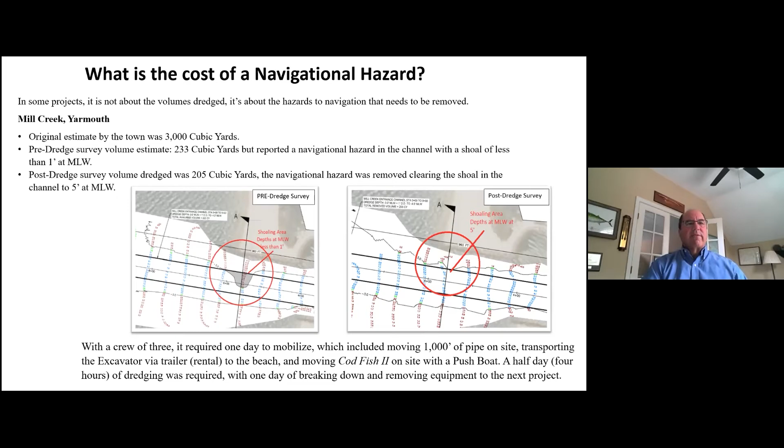And we ended up doing it, 205 cubic yards at $9 a cubic yard. So it was not a money maker for the county, but a very happy town because, again, we did clear the shoal. A day or two to get in and mobilize, probably about 4 hours to dredge, and then another day or two to get out of there. So this is just an example of a job that we couldn't say no to, we don't want to do it because it's too small. We have to do it, whether it's a very large job where we're going to be camped out there for 10 weeks, or if it's going to be a very small job.

And I think that's it. So a very high level and very, very fast. I think I probably used up all my time. I could have gone slower, and I hope after some questions come in, we can spend a little more time.

But thank you. Yeah, that's a great overview, Ken, especially for folks unfamiliar with the program. Just one quick question that I think is actually something that can be answered pretty quickly. So there was just a question about curiosity.

Is the enterprise fund funded by a use fee or by a tax to the towns? So who is paying into the fund?

Yeah, no, good question. We have a rate structure, very, very simple. If we're using a booster station, the rate would be $13 a cubic yard that the town would pay. And if we are not using a booster station, it's $9 a cubic yard. So for those of you that know what dredging costs in the private sector, we're probably about 70% under cost compared to private contractor.

So the towns are paying that amount. And again, they're either paying in joint venture, like in Mashpee with the private group that's funding the projects, or via the Mass Dredge Fund.

Thank you, Ken. Thank you.

All right, keeping things on time and moving right into our final talk before we move on to the moderated discussion. We've got Brenna McGlathry from Duxbury Beach Reservation. Brenna is the Assistant Director of DBR, the nonprofit organization that owns and maintains 4.5 miles of Duxbury Beach on the South Shore. DBR has extensive ongoing adaptive management and resiliency building projects in the works. And us at Woods Hole Group, we're always excited to partner with Brenna and the DBR team. So I'll turn it over to Brenna.

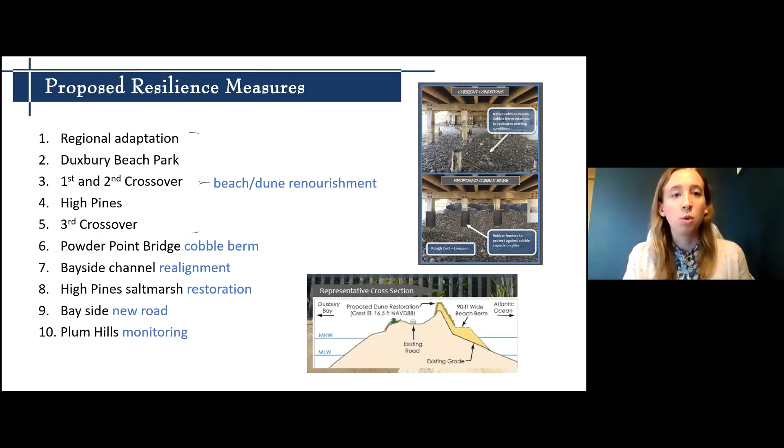The resiliency recommendations in the report ranged from beach and dune renourishment to salt marsh restoration to moving the channel in the bay. It was really a wish list of different types of projects. One major recommendation was regional adaptation involving beach and dune renourishment along a large portion of the barrier beach. However, knowing that scale of renourishment would be difficult and unlikely from a funding and material standpoint, the report broke out specific smaller areas where beach and dune renourishment would be beneficial, including dune renourishment between crossovers 1 and 2.

So that leads us into the project I'll talk more about. Crossovers 1 and 2 are vehicle access points from the back beach road, which is that skinny line of tan behind the oceanside dune. Those crossovers lead from the back road to the oceanside beach in the oversand driving area.

This spot is a fairly important part of the beach for several reasons. It's about midway down Duxbury Beach. It has some of the densest nesting activity for two protected species, piping plover and least tern. It's an important recreation area, and part of our drive-on beach, which is a major draw for the town of Duxbury to lease a large portion of the beach from DBR. That lease payment helps DBR maintain and restore the barrier.

The dune in that area protects a vulnerable portion of the back beach road. That road is the only land access and emergency access to the couple hundred homes on the communities of Gurnet and Saquish, located at the southern end of Duxbury Beach in the town of Plymouth.

Wave modeling indicated that this area experiences higher wave energy, suggesting higher erosion potential. In stretches between the crossovers, the dune had narrowed to less than 35 feet in width, with elevations similar to or just above the roadway. So the project was designed to increase the resiliency of the area.

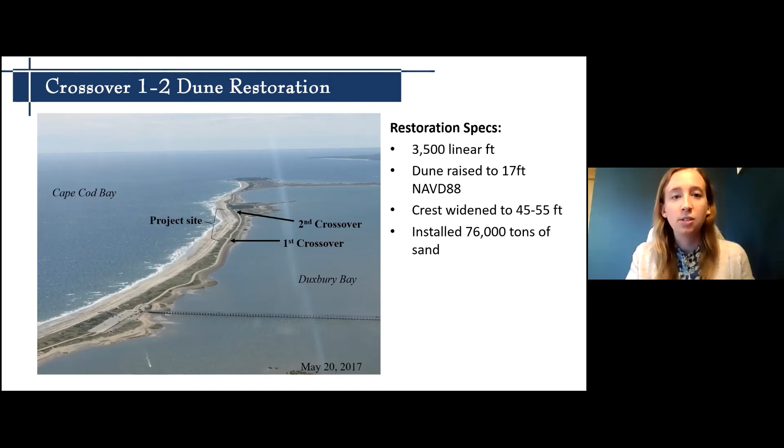In the end, the project spanned 3,500 linear feet. The dune was raised to 17 feet and the dune crest was widened to about 45 to 55 feet. 76,000 tons of sand and 70,000 culms of beach grass were installed, as well as 3,600 feet of sand fence. Both crossovers at the north and south end of the project were raised to be level with the adjacent dune, and one was re-angled to be further away from the prevailing wind and waves.

The project was also designed to adhere to bird nesting habitat requirements, with careful communication with the state's Natural Heritage and Endangered Species Program. Dune slopes, planting density, and even sand color were all decided with nesting habitat in mind.

This project, from DBR's point of view, has been very successful. This February, Duxbury Beach experienced overwash in over 10 spots along the barrier beach and quite a bit of erosion, including between crossover 1 and 2. However, a lot of the width and height of that new dune is still there. The beach grass and the roadway behind it fared fine in the storm.

A lot of the success of this project is owed to the consistency and communication that took place through the multi-year process. The project was developed and implemented through the course of three CZM Coastal Resiliency grants, starting with that coastal processes report before moving on to project design and permitting, and finally the construction piece. This meant CZM was aware of the project from the beginning and had a thorough understanding of DBR's goal in implementing the work, and was part of the discussions throughout the process, seeing the follow through from concept and design phases to actual implementation.

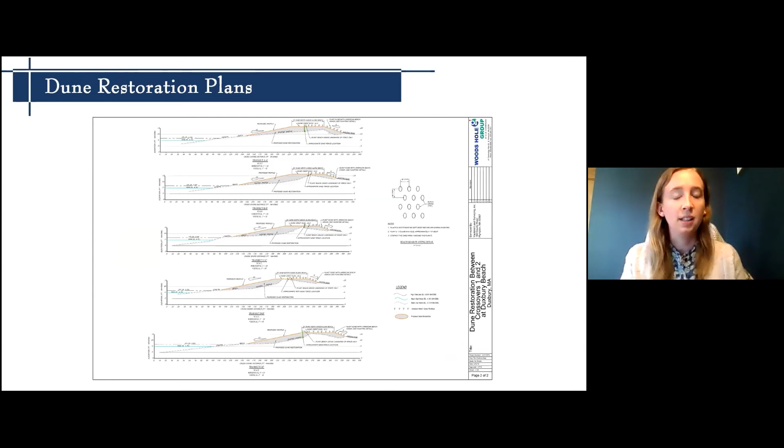So this is just an example of 5 of the project transects with the design for renourishment. And that was a really fun part, as the landowners who've been staring at these plans from Woods Hole Group for months started seeing it translate into reality on the ground. So I'll just go through some photos of that. In the upper left-hand corner there's a before photo, and then the others show the work being done.

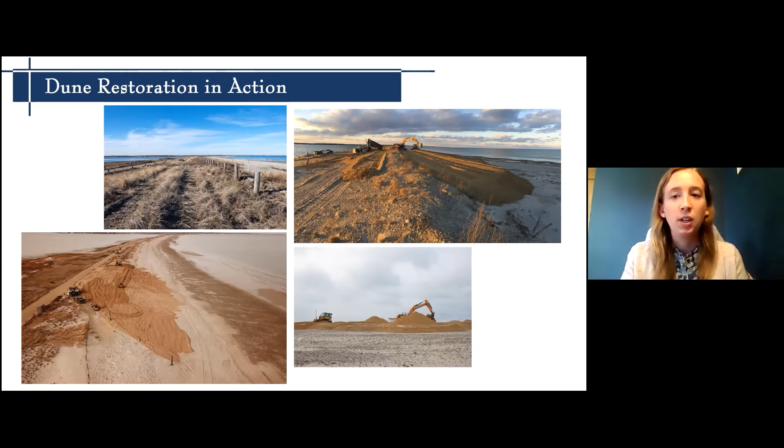Sumco and Woods Hole Group put together a great plan of how to coordinate the timing of the sand trucks and move down the road to different access points for the work. In the lower left, we see the second crossover where those vehicles are, where the work started out and then moved north from there.

So real quick, to close this out, I wanted to share a bit about where this project has led DBR since that winter of 2018, 2019. As I mentioned, DBR had a list of resiliency recommendations ready to go from that coastal processes report. However, that would mean restarting a multi-year process between design, permitting, and construction for each of those projects. So instead, with the support and advice of CZM, DBR began working with Woods Hole Group in fall 2019 on a more comprehensive planning and permitting program for the beach.

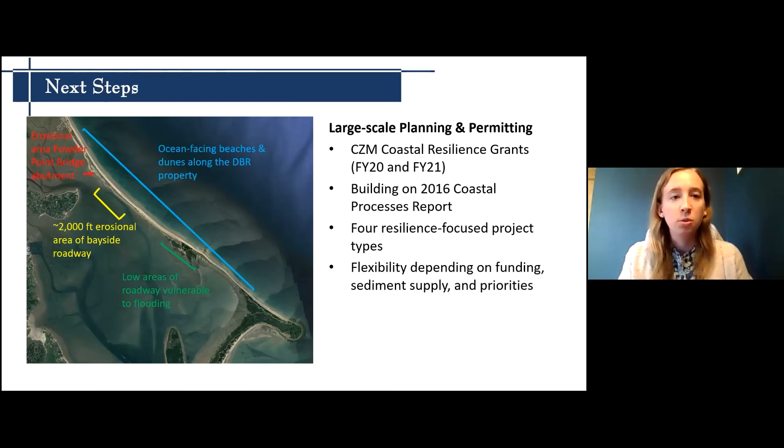So basically, we're in the second round for this work through CZM Coastal Resiliency Funding, working through designs and permits for 4 project types: cobble berms at the Powder Point Bridge abutment and along the bay side where the channel comes close to the barrier, beach and dune renourishment, and roadway maintenance work to address some flooding and stormwater runoff issues. So this project is building off of the 2016 report, and takes into account a lot of the lessons we learned working through design and construction of the Crossover 1 to 2 project.

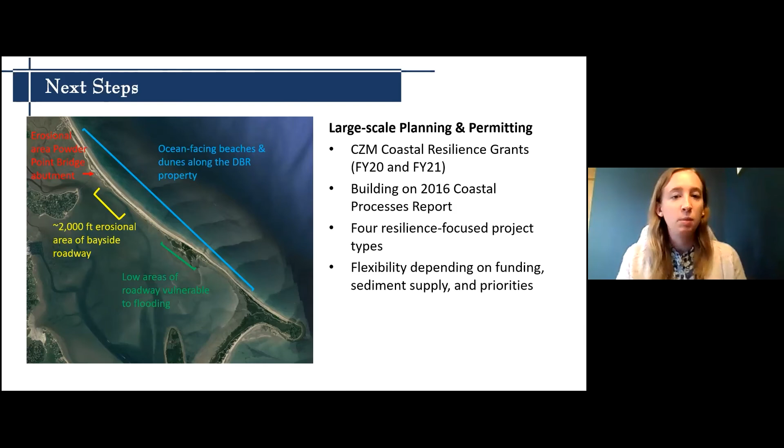And the great thing for DBR is once we're finished, we'll stand fairly ready to construct a host of coastal resiliency measures, obviously dependent on funding, sediment availability, and any kind of changing priorities on the beach. So although we're permitting for 3.8 miles of beach and dune renourishment, that is unlikely to ever happen all at once for many reasons. The idea is to work within that larger envelope in smaller segments.

So the first project on the docket is dune and beach renourishment at Duxbury Beach Park, which is at the northern end. This was one of the smaller renourishment projects recommended in that 2016 report and is covered under this current large-scale design and permitting work.

So currently we've received 1 grant to go towards the work and raised partial funds through a kind of takeaway event during COVID. So with the expertise of Woods Hole Group and the important support of CZM, we've made good headway on the permitting and hope to have that finished up by this fall or winter and get started on the actual construction.

So it's kind of a nice closing of the loop that started years ago with the initial conception of all of those nature-based resiliency projects for the beach. We've gone through a successful implementation, and that set us up nicely to dive into a more holistic look at addressing resiliency concerns on Duxbury Beach and starting to actually implement some of that work again.